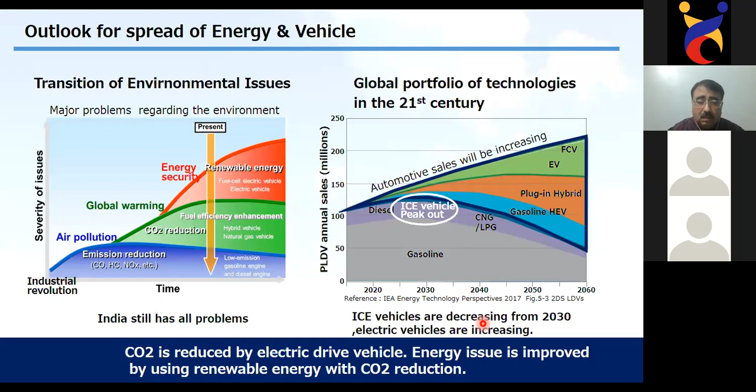Okay, so let us go to the next slide. Now let us understand the total cycle of this CO2 generation in context to automobiles, or in context to mobility.

Now, even if we have an electric vehicle, which is a complete electric vehicle working on battery and motor, or even if it is an FCV, fuel cell vehicle, tank to wheel, certainly there will be zero emission because there is no fossil fuel combustion. So the net result, as far as CO2 is concerned, the exhaust will be zero. In FCV also, the end result is oxygen and steam, water vapor, where hydrogen as fuel is used, oxygen from air is taken in, and in the electrochemical reaction these two combine to give electric potential. They release electrons through ions, and at the end they give only oxygen and steam. So their exhaust will be cleaner than even the atmosphere.

Yeah, that makes sense. So certainly it is better than using fossil fuel, but it is not the best option for us at the moment. But for other developed countries, as I showed in my previous slide, yes, it is the best solution for them, because they have gone far ahead with electrification. I don't think this data calls for us to have matched them right now. There is this condition holding us back a little, because the kind of effectiveness in reducing CO2 that electrical vehicles will give to those developed countries, when we talk of well-to-wheel, it will not give to us.

So, looking at this scenario, the best solution for us is hybrid vehicles. Hybrid vehicles are those which run on both battery as well as engine. Most full hybrid vehicles - I'm not talking about plug-in hybrids right now - have, even if in two separate units, an engine and a motor. A generator is also attached to the engine. When the engine runs, it charges the battery, and in turn the battery runs the motor, and that is how power is transmitted from the motor to the wheels. But when the battery charge percentage reduces, it automatically shifts back to the engine, and power is transmitted from the engine also onto the wheels. So these are called hybrid vehicles.

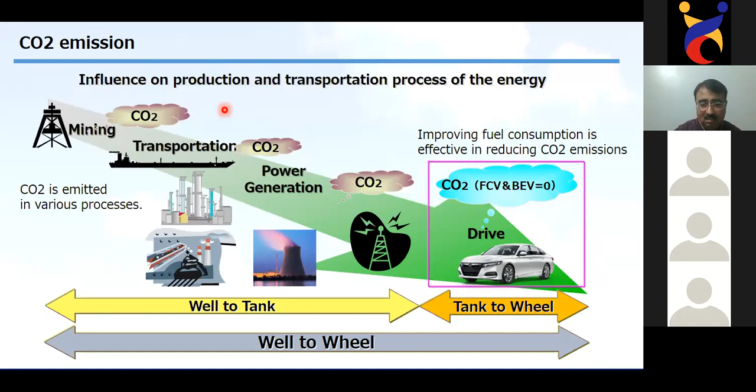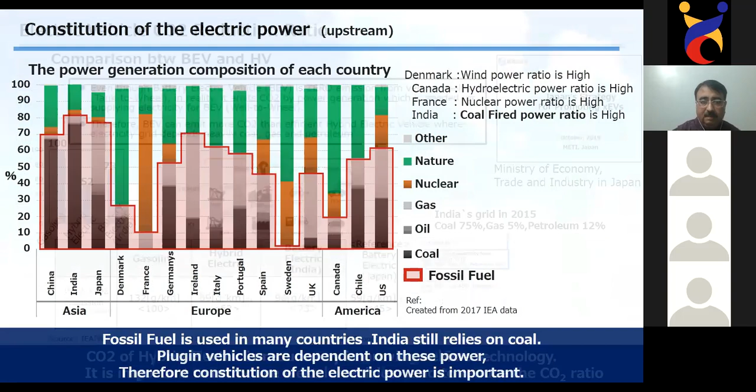But in spite of all that, as explained by Dr. Nikhil, and here also I'll just once again say that today this is our situation, this is the actual fact. About 61% of our power generation still depends upon coal, and we have abundance of coal. So because of these negativities or demerits also, we cannot immediately discard it.

But with time, we are also developing renewable energy resources, which at the moment are there, but we assume that by 2030, our electricity generation through renewable sources will be 43%, and coal requirement for electricity generation will reduce to about 40%. Then there will be other sources of electricity generation.

At that time, certainly using electrical vehicles will have a different proposition when we talk about well-to-wheel CO2 generation. So, from here to 2030, shall we wait, or allow our infrastructure to develop for electricity generation, or do we have other options to work upon? This is what we need to debate. And look at this scenario.

We are talking about EVs, and improving the efficiency of IC engines is also important. But one link is missing in this whole strategy, and that's where I want to bring your attention. That technology is available. As I've shown in my previous data, there's one question still bothering me: all the hybrid electric vehicles have been high-end vehicles, whether BMWs, Toyotas or Hondas, they're all in the high market segment. But where the maximum number of vehicles are in the lower market segment, nothing is being done, globally. We keep talking about it, but there's no strategy adopted by vehicle manufacturers on the low end side. Let me be candid about this.

Yes, there are different strategies adopted. Why hybrid vehicles target 1000cc and above, rather 1500cc and above vehicles - there is a reason. Small vehicles, because of their small volumes, there's another way to take care of it - improving the efficiency of vehicles. You must have heard about the terminology 'downsizing of engines'.

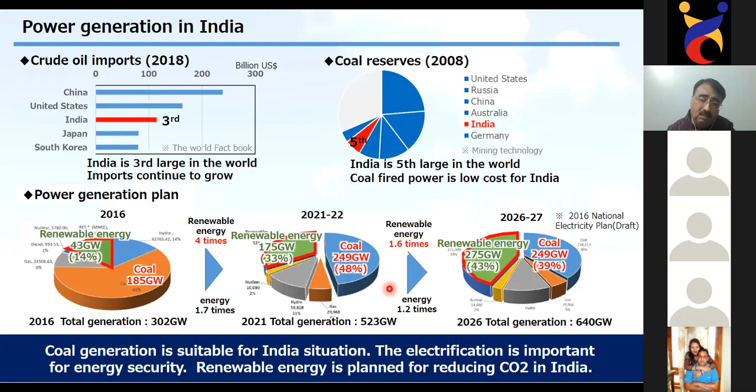So this is what we said, that this is the total scenario wherein by 2030 we will have these renewable energies, much more use of renewable energy than the use of coal for electricity production. So at that time we should have all our electrical vehicles ready to be launched.

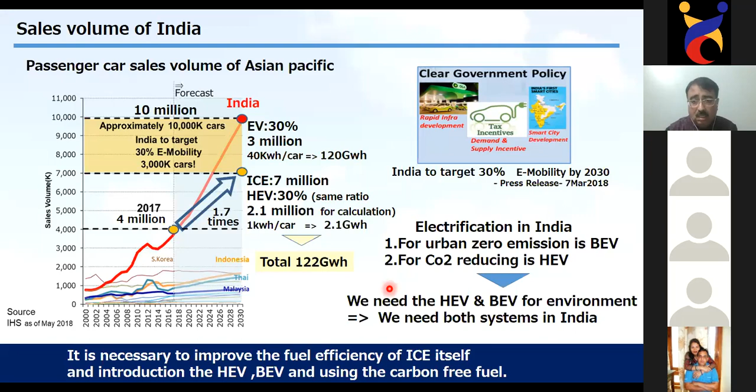And then we said that by 2030, as our government is talking about EV, EV is just 30% of 10 million. But the IC engines will also swell. We are not talking about that. How to take care of that? So that is where we must fix it in from today onward. We must insert this HEV concept into the whole picture, which is very important for all of us. And why it is important, I'll explain in my next slide.

See, now it is about the battery. The major constraint, as you all know, for electrical engines are the batteries. Batteries will actually store the energy which will be used as power to run the vehicle and to cover the distance also. So the energy density, the power density in the battery is very important. That is today's biggest problem, biggest constraint in the batteries.

And for that purpose, see, just a very small thing: at the moment in our IC engine vehicles, we have a fuel tank of say 40, 50, 60 liters. And what happens is if we fill that fuel tank, we can run about more than 400, 500 kilometers in one go without refilling. But batteries, existing batteries, cannot run that much.

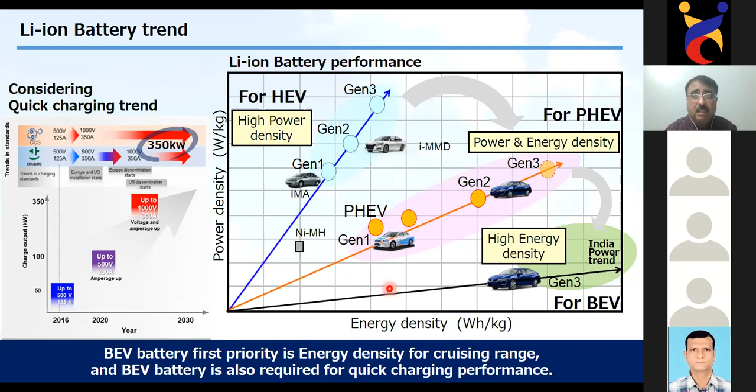Now this is very important to understand. Let us understand the lithium ion battery energy density when we compare it to different fuels, as compared to gasoline. The lithium battery density is 20 to 100 in ratio.

That means gasoline requires much lesser space, much lesser volume of gasoline can store much more energy to run the vehicle. So in reverse, if I put battery, I need much more space. The battery should be big enough to store the equivalent amount of energy as a small tank of gasoline stores.

Now, space is also a constraint in our vehicle. And battery, because of safety, cannot be fitted in the crush areas of the vehicle, since these are high voltage batteries. Crushable zone means the front and rear, wherein if some collision happens, these zones get crumpled so as to provide safety to the occupants of the vehicle as well as to pedestrians, in case the collision is with a pedestrian.

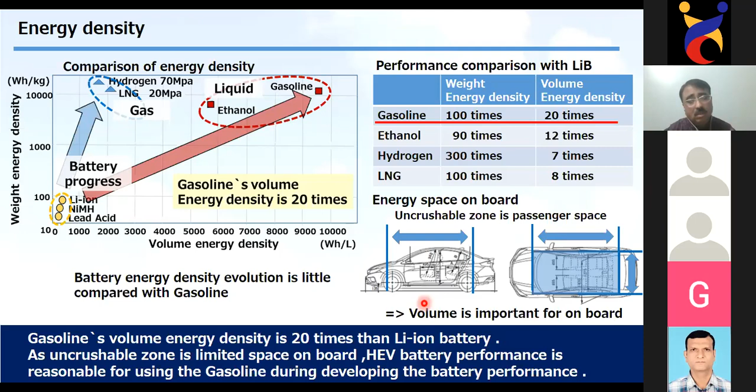So if I sum up, we have to strike a very delicate balance for our electrical vehicles as far as driving range is concerned. If we increase the driving range, it requires more power. More power means more weight of the battery, and more weight means more size, high cost, and then supply will be an issue for manufacturing such batteries and accommodating them into the space available in the car.

So another concept, till we go in for full BEV, is affordable EV. We compromise on range of travel, have some reduction in weight and size of the battery. Rather than comparing with IC engine vehicles that run 500, 600 kilometers, we may have electrical vehicles which run about 150, 200 kilometers. Yes, that will make their usage limited to certain areas only, but if we want, this is another solution available. We must look for such solutions.

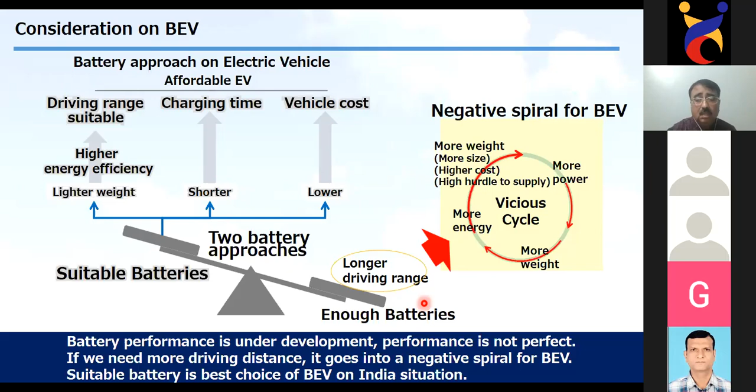Now, the third thing is the battery itself. We have heard that in future, with so much development, so many manufacturers, so much manufacturing capacity coming in, battery prices will come down. Yes, they will come down to a certain extent, because it is all a supply and demand relationship.

But there will be a time when electrical vehicles all over the world will swell. Then there will be a turning point, and for the various minerals and metals used in those batteries, their supplies will be much lesser than their demand, and that will shoot up their cost.

Like cobalt, lithium, nickel, by 2024-25, their cost is going to shoot up, because if we continue to grow in the same proportion, certainly their supplies will be much lesser than their demand, and that will further add to the cost burden onto the electrical vehicles and the batteries used in them. So another challenge is to make batteries which are minus these materials, or at least some of these minerals or metals.

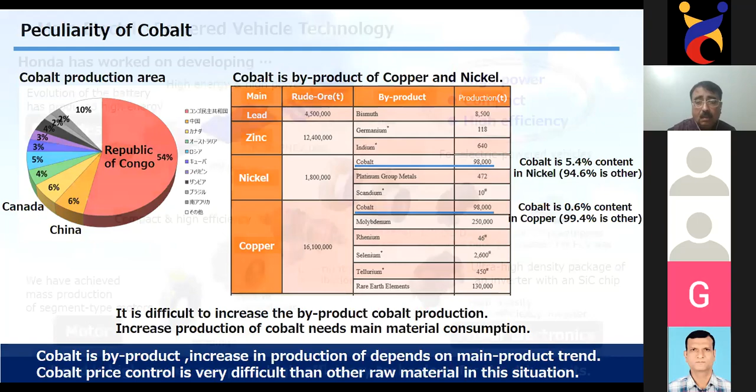Okay, so now we are coming to what exactly hybrid and electric power vehicles are. This is how things are under development. There are four or five major components an electrical vehicle must have: battery, motor, power electronics. In power electronics, they should have a converter and a booster.

Now you see, we start from battery, from nickel to nickel metal hydride batteries, that is nickel cadmium, which are chargeable batteries, which were the very initial. You must have seen the cells, the batteries used in our toys, which are chargeable batteries. These are nickel cadmium batteries.

From there, for our HEVs, we have to go to lithium ion batteries, but their size will be less. For plug hybrid, their size will have to further increase. And for BEV, the whole of the uncrushable space within the car may be required for batteries only. So this is how the battery situation is when we go for different steps of electrification.

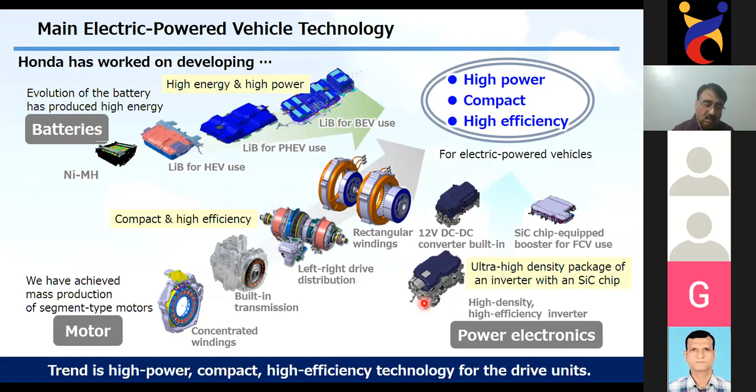Yes, this is the latest that is being used for these electrical motors in vehicles, and so on. So these are the main components, and then when these SiC chips will come, probably by that time the other electrical components will be of much smaller size and much lesser weight. But at the moment, the converters and inverters are quite big in size and heavy. So these are just to give you an outline of what electrical vehicle basically consists of.

Now if we look at the power generation, what kind of fuel will be used in IC engines as compared to hybrids, and then to BEV. In 100% IC engines, the power given to wheels, transmitted to wheels, is from the engine itself. In hybrids, a part is from engine and a part is from recharged batteries, through motor which run on recharged batteries. And this is a very simple depiction, but it is not that simple.

There are various conditions which are regulated by the ECU, electronic control units, or power control units. They actually regulate the power used from engine as well as power used from batteries through motors. But in battery electrical vehicles, the whole power will be used only from electrical.

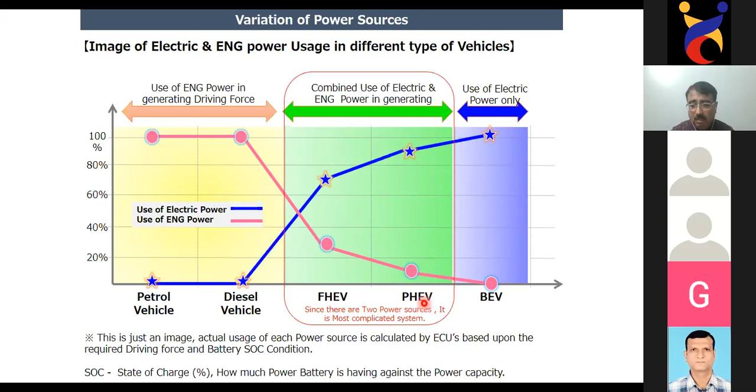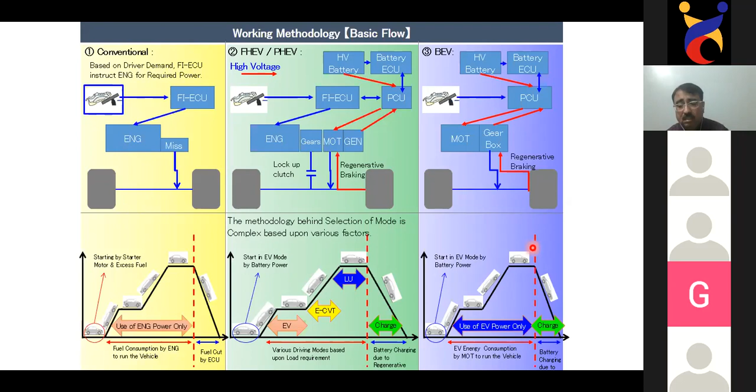So what we can see here is that a part of HEV is exactly same as EV. This is, uh, take this—okay, sorry.

So what happens is, whatever we develop today for HEV—components, technology, battery, inverters, electronic components—as it is, those will be carried forward to EV when it comes to implementation. So what I want to say is that using HEV, we are basically heading towards BEV. We are actually developing technology for BEV also, so HEV will become the stepping stone for BEV.

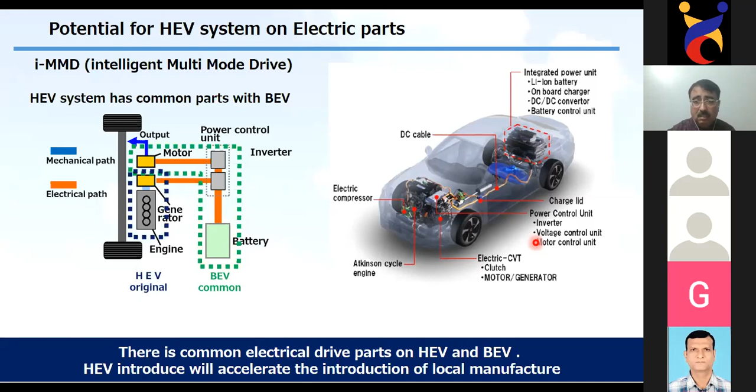Up to 10-12 kilometers, wherein what we can use is electrical two-wheelers, small light three-wheelers, electrical three-wheelers, and replacement battery four-wheelers. Then city to suburb, wherein we talk about a distance covered of about 30-40 kilometers.

There we talk about HEVs, and we should also talk about affordable EVs, where the range is, let's say, 200 kilometers. So if somebody has to travel to office or to his or her workplace for say 40-50 kilometers one side, these are quite good enough vehicles. Why do they need to have a vehicle with a range of 400 or 500 kilometers?

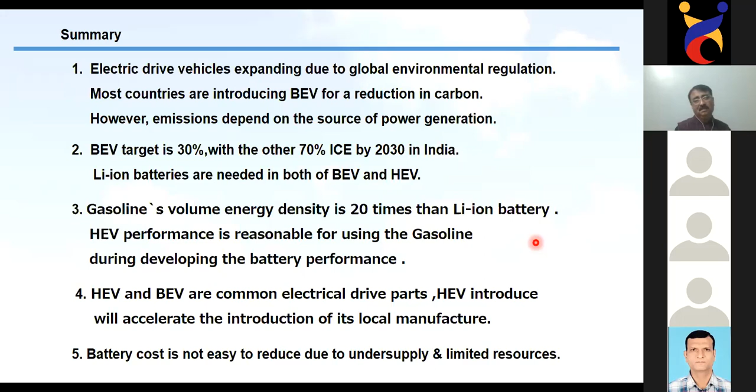Only I will tell you, because my brother-in-law has such a car. In fact, my sister's whole family mostly has either an electric car or a hybrid car. My brother-in-law's hybrid car, up to 40 miles per hour speed, works on battery, and after that it automatically switches to petrol. Yes sir, you're right.

If I show you this schematic diagram, look at the center one, this is hybrid. The y-axis is speed, x-axis is distance or time, whatever you take. Initially, starting from zero, no engine, up to a certain increase in speed it will be all EV. Then if you maintain the vehicle at that speed, again no engine. Then after that, if you further want to accelerate, it comes to ECVT, that means in series, the engine will work with the motor.

This is our technology. This is Honda's technology. And he has a Toyota one. Toyota also has the same technology.

Let me clarify, sir. What you're talking about is hybrid, and what I was telling was about Ciaz, which is mild hybrid. That does not work on this principle. It works on a different principle. It does not start with the electric motor or through battery. It is a pure IC engine, and it starts as an IC engine.

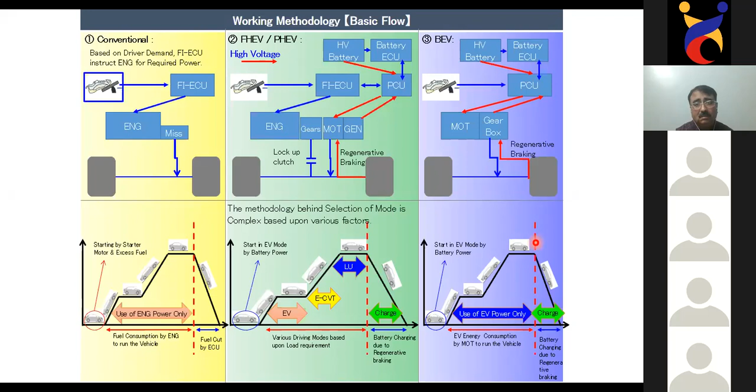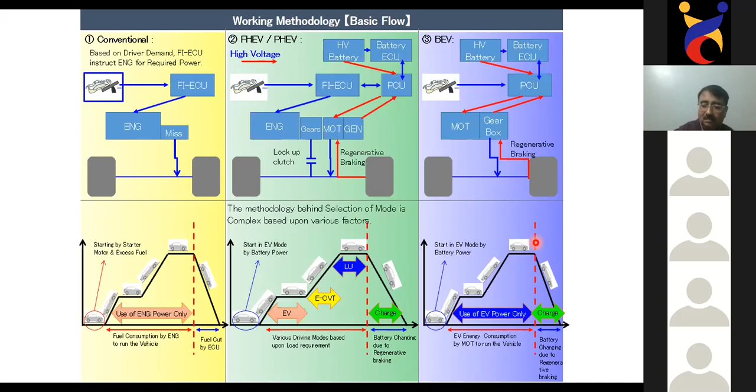Ek cheez aur thi - in fact, we had heard it in my ex company also. They were, of course, that is for heavy vehicles. That this thing was that we swap in kind of batteries because of the restrictions of charging and other things. There was a technology that was being tried, where you remove a battery and put another battery, go to a station. So how is that coming up? Is that the possibility? Uska promise lagta hai? Yes sir, for heavy vehicles.

My ex company were trying something like this, swap in and swap out, I don't know what has happened now. Jahan pe for example if there is a bus, unke bus depot mein wo apna battery nikaalenge, doosri daalenge, and then the vehicle hardly has to stop for 5-10 minutes and go.